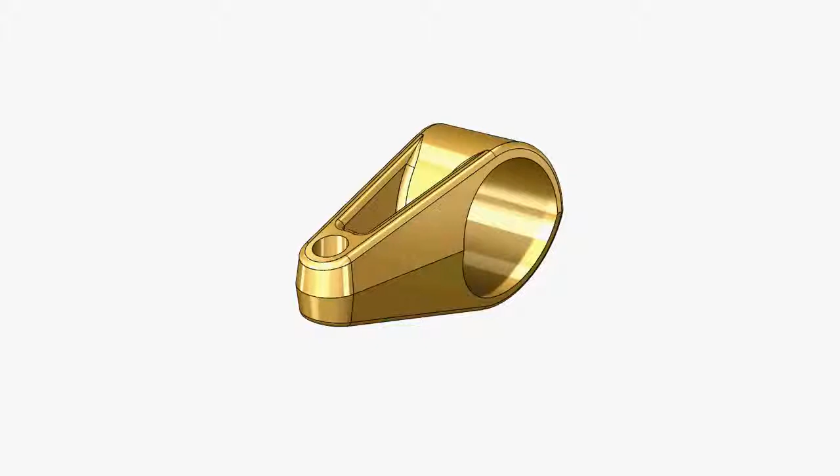Welcome to another video where we're going to take a look at the Model Mania Design Challenge from SOLIDWORKS World 2002. If you're unfamiliar with Model Mania, it's a design challenge held every year at SOLIDWORKS World where you're given a drawing similar to this and you're tasked with creating this part in SOLIDWORKS both as fast and as accurately as possible. And if that wasn't challenging enough, once you're done with this part, you're given a second drawing where you have to make a variety of changes to the part.

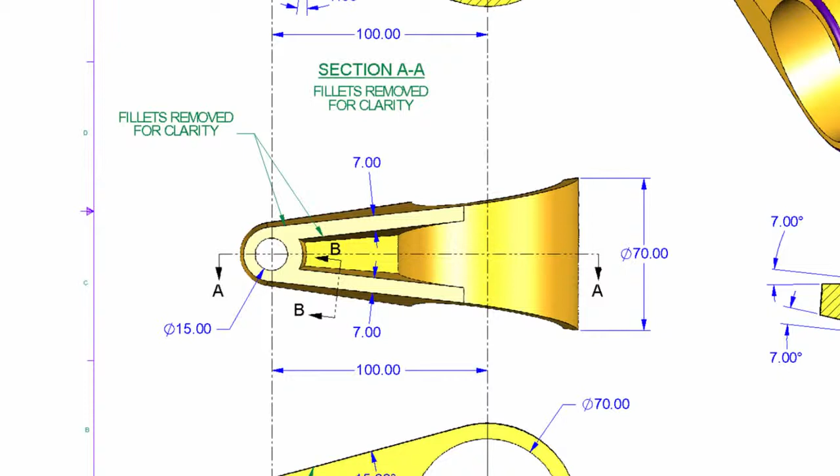Now we're going to hold off on looking at the second drawing until we get to that point because there's some surprises there. But let's go ahead and look at how we might tackle this. One of the first things you'll notice is that this part is symmetrical, both about section AA as shown in the top view, so from left to right, but also from top to bottom as we can see both in the section view itself and the front view.

Now, also unique is the direction of the two holes in this part. The main 70mm bore in this part appears in the front or right-hand side view, where the other bore of this part comes down from the top, and yet we have to capture that relationship. So let's go into SOLIDWORKS and look at how we'll tackle this. The first thing I want to do is start by capturing most of that profile, keeping in mind that this is a mirrored part or a symmetric part.

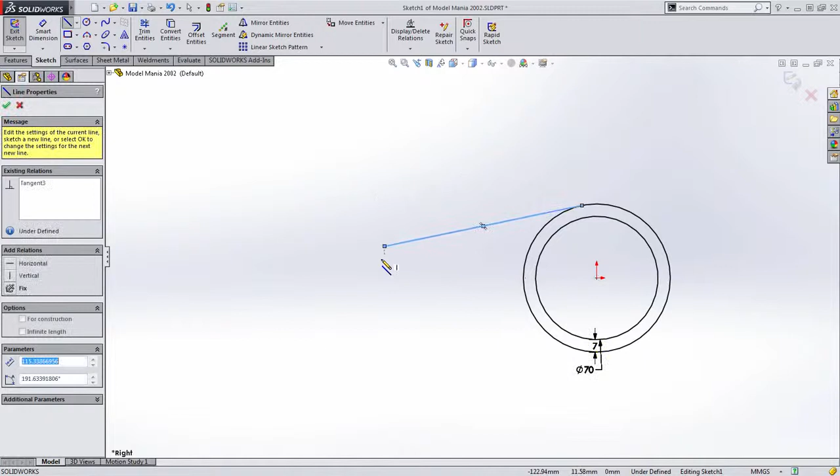I'm going to start on my right plane and I'm going to start with one of the easiest features, this big 70mm diameter circle. And while I'm at it, I'm going to go ahead and capture that 7mm offset right now as well. The next thing I know is there is a line that comes off from this circle that's tangent. If you drag a line out from a circle while maintaining tangency, you'll notice that that line will preserve that. I'm going to just drop this out here, and then we'll draw the rest of this profile. I'm going to snap out here and out here.

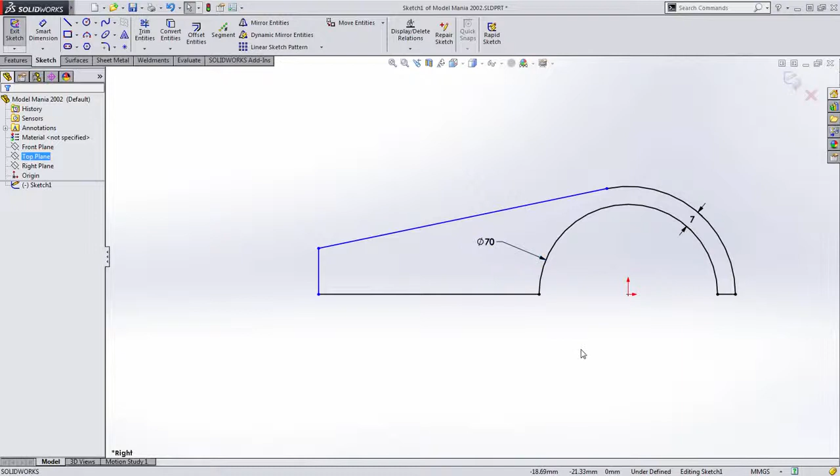Now, if you've watched the previous videos, I like to use contour selection, and we'll go ahead and do that again here. I'm going to go ahead and just trim these arcs. Now I could go ahead and remove all of that just like so as well. But keep in mind, you could have left this. There's no reason you have to trim this. Now the next thing I need to do is capture this angle. That's 15 degrees. Let's drag this in because I know that that's pretty long. So we'll set that to 15. And now we have to determine where the end of this is.

Now the end of this, if we go back to the drawing, is determined by the diameter of the bore in the top, but also the 7mm offset to the outside. So if we come back, how do we capture that? Well, there's a variety of ways you could do this. You could do this doing some math. For example, you could put a construction line in here, and you could say, well, it's 100mm out to the center of this circle. And then you know that from here to here, it's going to be half the diameter. So we could type in 15 divided by 2 plus 7mm, and we could get it that way.

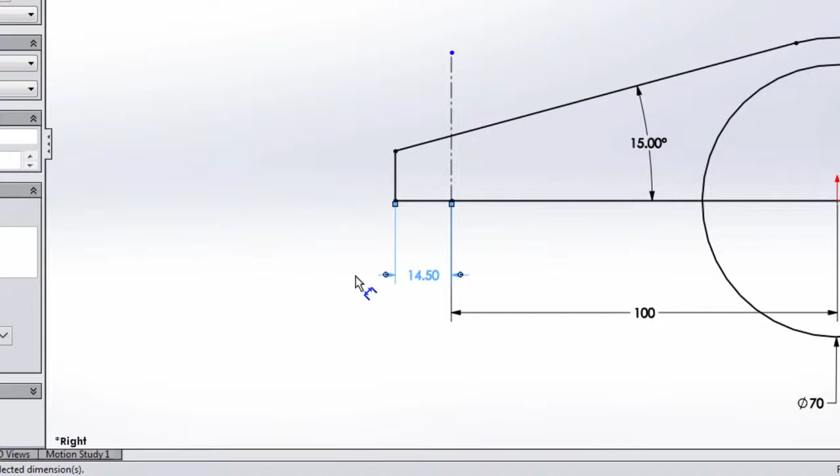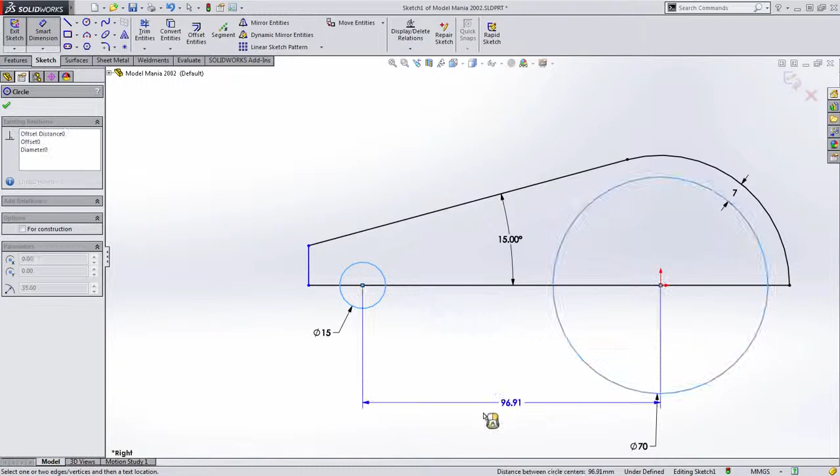But what happens if the diameter of the circle changes or the offset? You'll have to go back in here and recalculate all of that. So this isn't a very efficient way of doing this. So let's go ahead and delete this geometry and think of another way. Even though the circle is drawn from the top view, there's no reason we can't use a circle and capture this information here in an earlier sketch. So I'm going to do just that. I'm going to dimension that 15mm diameter circle 100mm off from the primary bore.

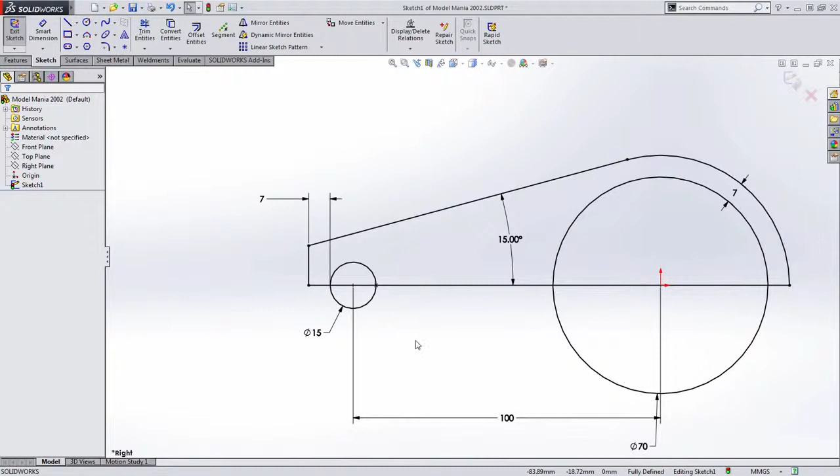And then I'm going to dimension from the end of the part, and while holding the shift key, snap to the tangency of that circle and specify that 7mm dimension. And now that the sketch is all black, we know that it's fully defined. We're not going to use this circle when we go to extrude this, but we will reference it later. In fact, I'm going to do a little trick here to save me some time later on, and I'm going to drop a point on the quadrant of that circle. You'll see in a minute where we use that. Now I'm going to close this sketch, and I'm going to choose to extrude it.

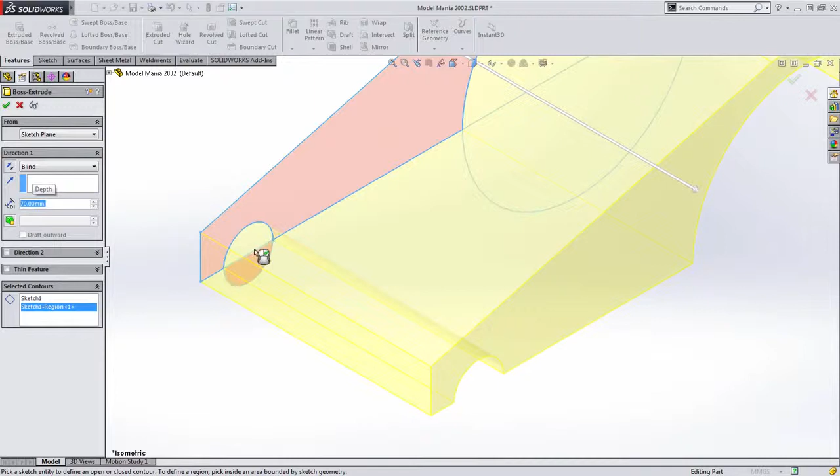And because SOLIDWORKS doesn't give us a preview, you can also see by looking at its cursor, it's looking for contours for us to use. So I'm going to go ahead and choose the main contour here. And if we drag this out to the 70mm it's supposed to be, you can see that we get this arc from that circle. Well, this is the real beauty of contour selection. I can just select that circle and fill that in.

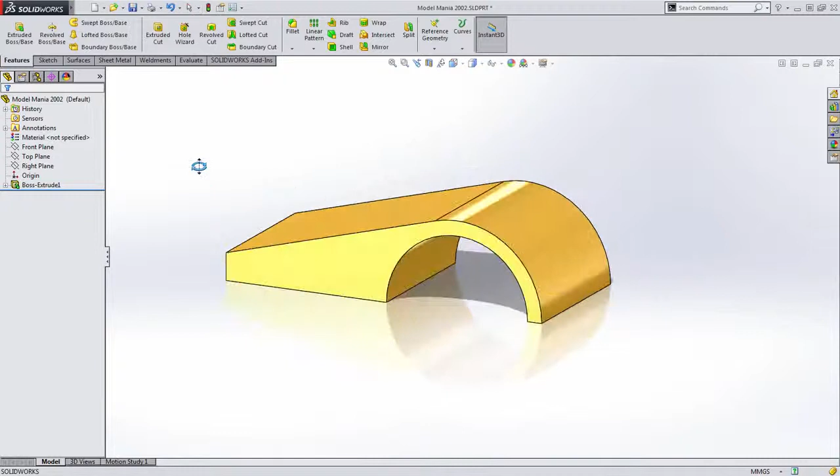Now, I did choose to extrude this 70mm, but it is a symmetric part, so it probably makes sense to maintain a midpoint relationship to keep all that geometry in the middle. That'll be especially important in just a minute here, as you'll see. So we've got this main body of our profile done.

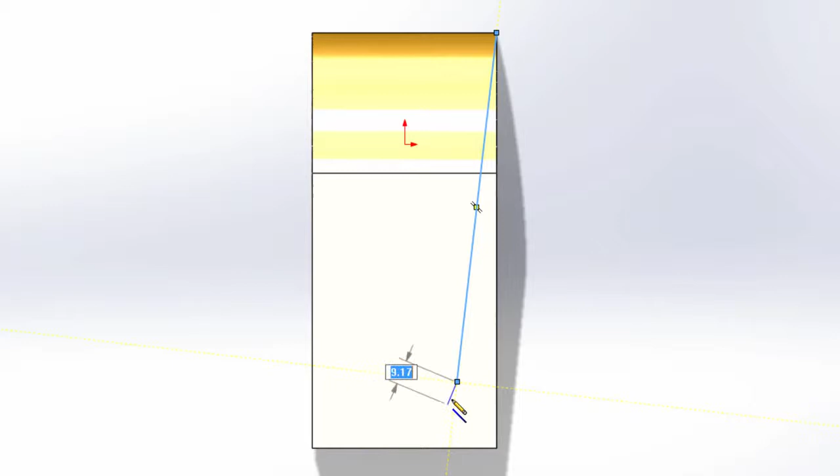The next thing I want to do is I want to look at bringing in those sides out to that tangency. So a good place to do this, we're going to draw a sketch on our top plane. I'm going to draw a line from the vertex up here, and I'm going to bring it down, and I'm going to use this trick that's inside of SOLIDWORKS where, while you're in the line tool, if you go back to the end point of a line, it'll actually snap and switch to an arc. And we'll draw another tangent line, and you can see I didn't get it quite in the center. That's okay. I'm just going to drop this here, and then we'll just drag that and snap that into place.

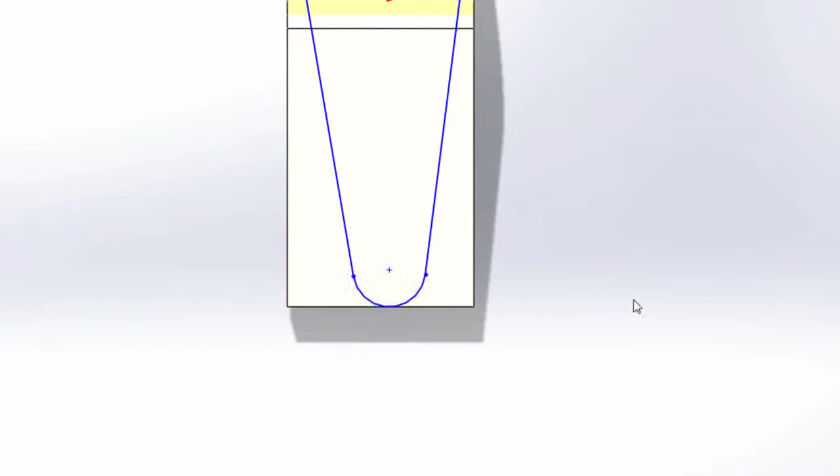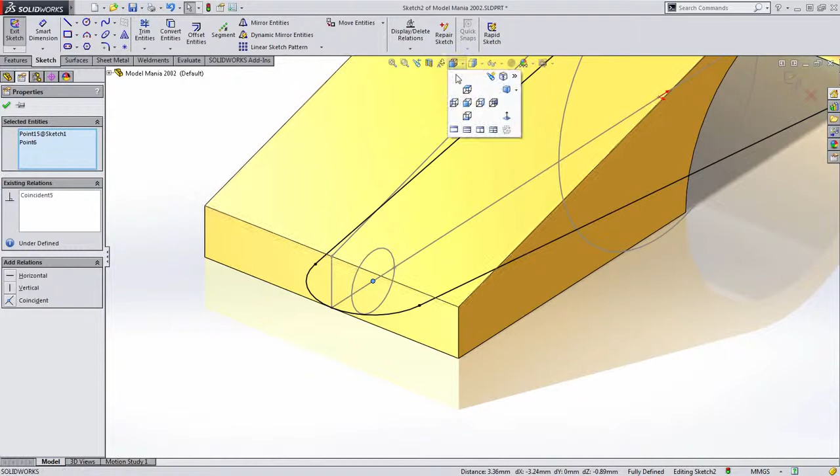Now, I know that this arc needs to be tangent to the end here, but I need to somehow calculate the diameter of this. Now, again, we could do a bunch of math, but what we're going to do is we're going to use that geometry we created in that first sketch. In the Feature Manager tree, you can click on any sketch and choose to show it. Once that's done, you'll notice now I can take the center point of this arc and, holding my control key, select the center point of this arc and make those coincident to one another. If you look at the top view, you can see that what we did is we captured the center point of that circle in that very first sketch and we're reusing it here.

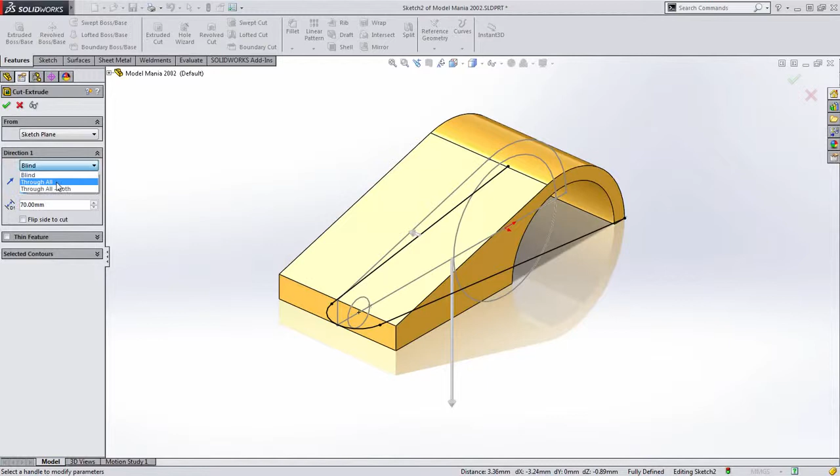The next thing I'm going to do is I want to cut this out. Now you'll notice something unique about this sketch. It's not closed in any way. That's okay. SOLIDWORKS will allow you to use this. When you go to use an extruded cut with an open profile, SOLIDWORKS presents you with a few new options. One of them is this little arrow with the flip side to cut. And if we change this to a through all end condition, what SOLIDWORKS is actually going to do is remove all the material on the outside of that sketch geometry. So we could have gone in and drawn the rest of that geometry, but there was no reason to.

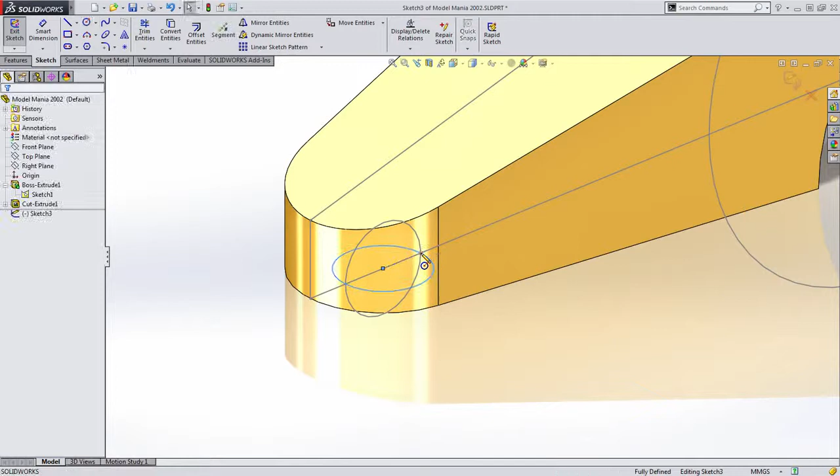Now I'm going to reference that sketch again. This time we're going to draw the actual cut that goes through here, and you'll see how convenient that point we created is going to be. I'm actually going to snap from the center of the circle to that point we created on that vertex, and then all I need to do is go ahead and do a cut extrude. I'm going to switch the direction and change that to a through all end condition. Now I'm done with that sketch, so I can go ahead and hide it now. And that easily we've created the top half of our part.

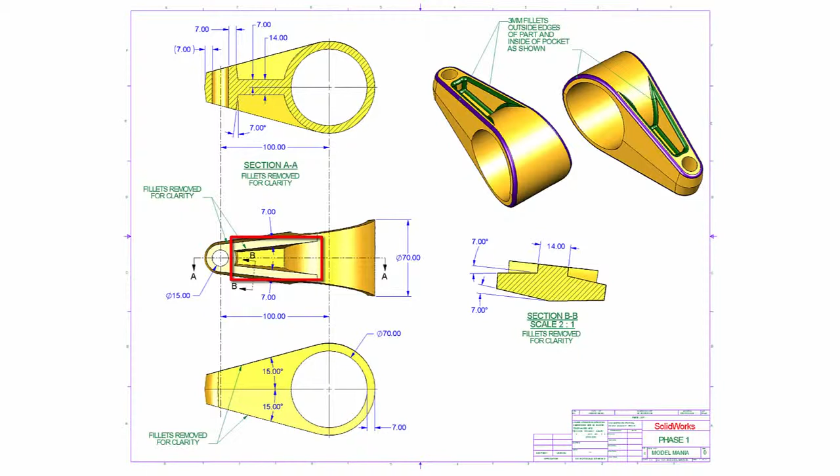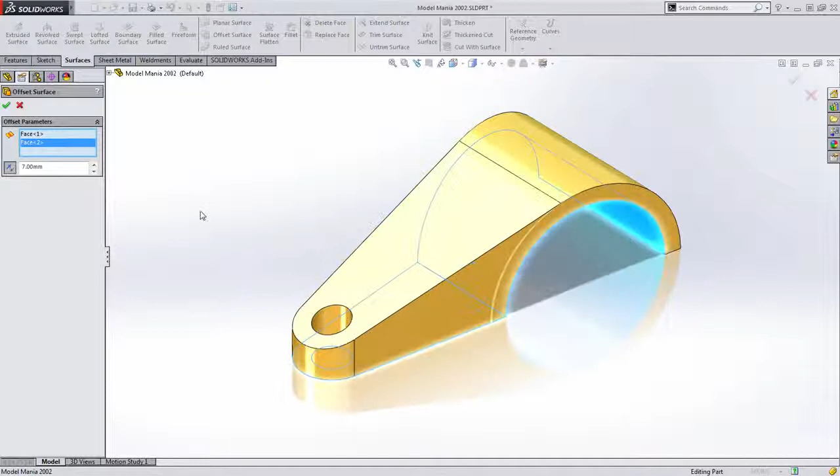Now if we go back to the drawing, the next significant feature is going to be this pocket. And you'll notice it's a 7mm offset from all the surfaces around it. So let's go back here to the SOLIDWORKS part, and I'm going to show you two different ways you can tackle this. The first way is actually using some surface geometry. If I go up to my Surfaces tab on the Command Manager, we can create an offset surface of 7mm, and I'm going to offset this bottom face and this face here, and I'm going to choose to reverse their direction to the inside. Now, you might not be able to see those, but if you'll notice, a new folder has appeared in the Feature Manager containing this new surface body. There you can get an outline of it. Let me show you how we're going to use this.

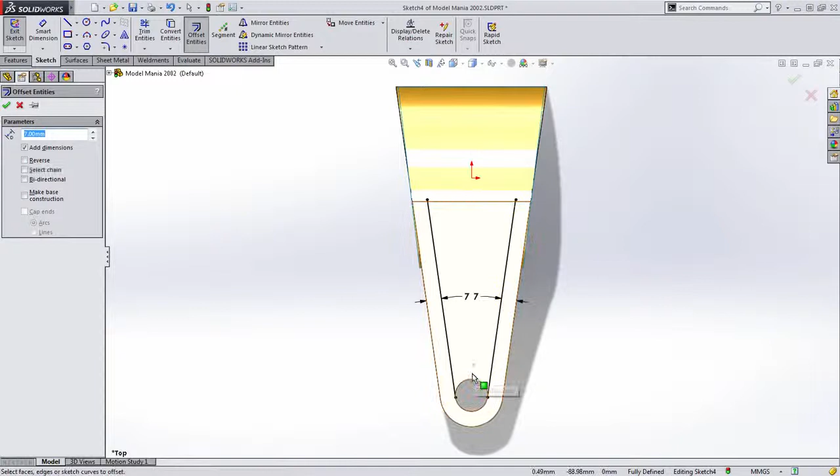I'm going to start a sketch on the top plane. And what we want to do is we want to offset several different pieces of geometry. Again, 7mm. So I'm going to offset that edge. Let's do that again to offset this edge, and then one more time to offset this circle here. Finally, I'm going to go ahead and clean this up by using Power Trim, and we're just going to get rid of some of that excess material.

And in this case, we are going to close the sketch off. Now you're probably wondering, how are you going to use a sketch down here on the top surface to cut something up here? This is another great feature inside of SOLIDWORKS. When you cut, you can actually go in and choose to do the cut from an offset.

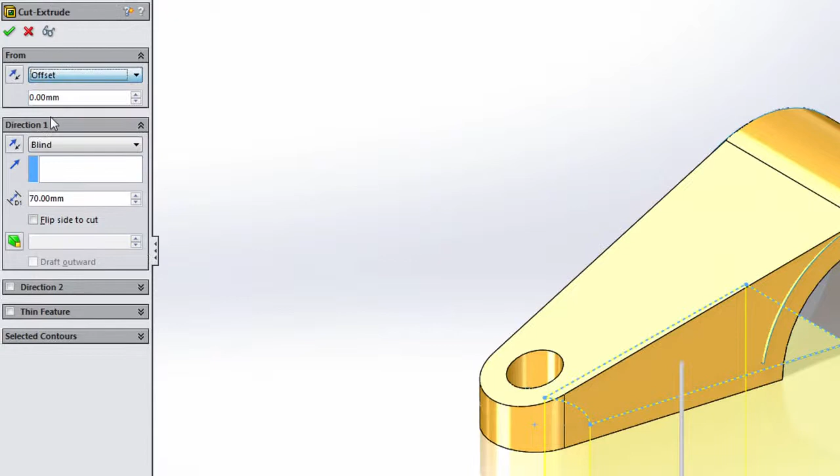Now, the diameter of this arc could change, so we're just going to set this way out there in space, like 100mm, and notice that the cut actually starts up here. And then for the end condition, we're going to change this to an up to surface cut condition, and I'm going to pick that right out of the graphics area there, and there we have it. We've gone ahead and created that cut.

Now at this point, you don't really need this surface anymore, so you can either choose to hide it, or I prefer, if I really don't need it, to just delete the surface out of the part altogether. We just needed that for some reference geometry. Now, the next thing we have to consider is all of this draft on this part. And I actually made a mistake intentionally here.

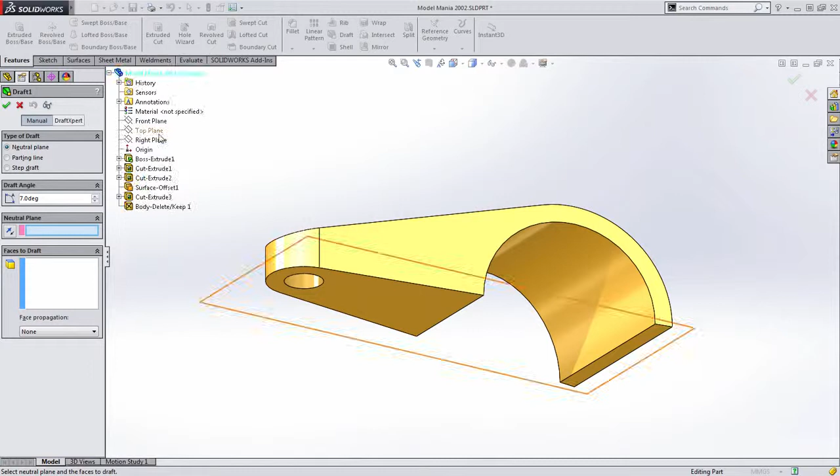The first piece of draft we're going to run into is along the outside of the part. This needs to draft 7 degrees in, and a neutral plane draft is a great way to accomplish this. I could pick this face or the top plane. I always like to use the system planes whenever possible. And we just select the faces that we want to draft. And when I right click, SOLIDWORKS drafts those in, but look what's happened.

The offset of our material wasn't right in this case. This is actually very easily corrected. You'll notice if I go over to the Feature Manager tree, if the draft had happened before that cut, well, the cut would have been offset from the proper 7mm. So you can see it's really easy to quickly manipulate the Feature Manager tree to make different changes. There's no reason to go back and undo what we've already done.

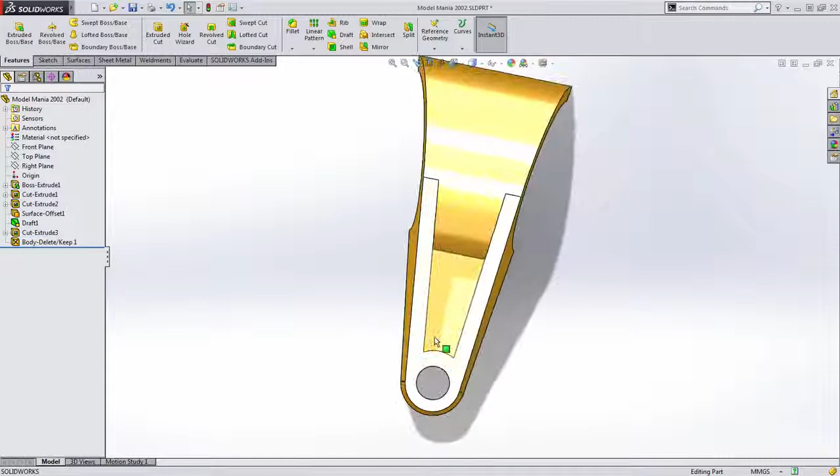Now the second draft needs to start from here and go inwards. So how do we capture that? If we did a neutral plane draft from this surface, it would make this part way too thin. This is where parting line really comes in, and you heard me accidentally mention that. Parting line draft works in a similar manner in that you select a pull direction, but instead of faces, we're going to choose edges to draft from.

Now I'm going to grab this edge, and you'll notice this arrow. That tells me it's going to draft this face. You can change that, but we don't want to draft that outside face. We want to keep that down. So let's go ahead and grab all these faces, and we'll make sure that those arrows are all going in the right direction. They're a little hard to see, but when I hit OK, SOLIDWORKS just reverses the draft.

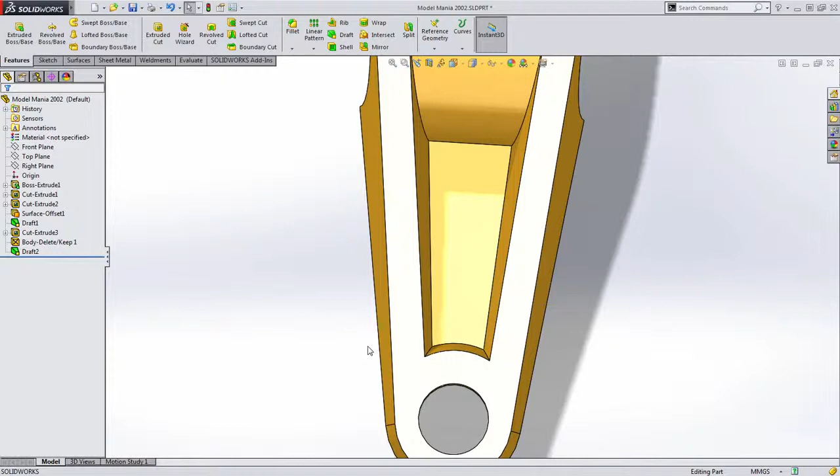We didn't have to do the math and subtract 7 and then another 7. It just took care of it for us. And that's it. We've got that. The next thing we could do is add some fillets, but I want to go back. I mentioned there's a couple ways we could have created that pocket. I did this with some surfacing.

I'm going to go ahead and delete this surface, and we're going to go ahead and get rid of several of these other features here. I'm not going to create a cut in this manner or this draft for that manner either. So here we've rolled back. We still have the draft on the outside of our part.

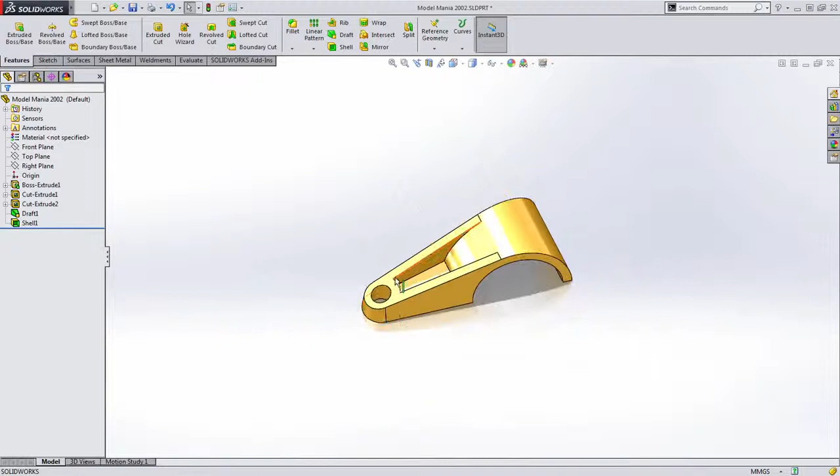Another way we could have tackled this, if we know that the wall thickness is always going to stay 7 millimeters, we could have used a shell feature, and by selecting this top face, it shells and hollows that out to that face. Now notice in this example, because of the order of the draft, these faces are tilted inwards. They're offset from that outside face.

Well, that parting line draft actually works really well here, and all we have to do is specify that draft angle, and SOLIDWORKS will fix that orientation automatically for us. Now you see how I got that error? That means that one of these edges is potentially going in the wrong way. My errors disappeared, so we're going to go ahead.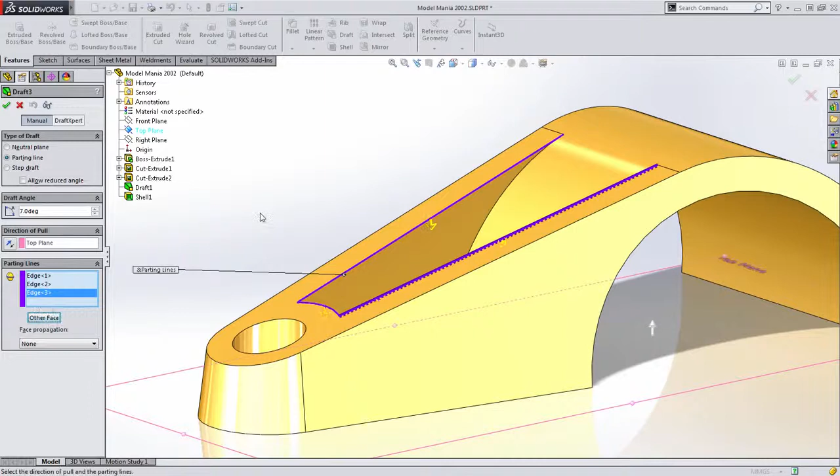There we go. See how these arrows are pointing to the outside? We need to correct that. So I'm going to grab those edges and make sure that those are both pointing down, and now when I press OK, we get the same results as before. So there you have it, 2 different ways to look at a very similar problem. Shell's probably the easiest, but it requires that all the offsets always remain 7.

The other way we did it, we could change any one of them. Now, the next thing we want to do is there are some fillets on this part. If we go back to the drawing, you can see there's a bunch of fillets on that inside pocket. So if we come back here, how are we going to do this?

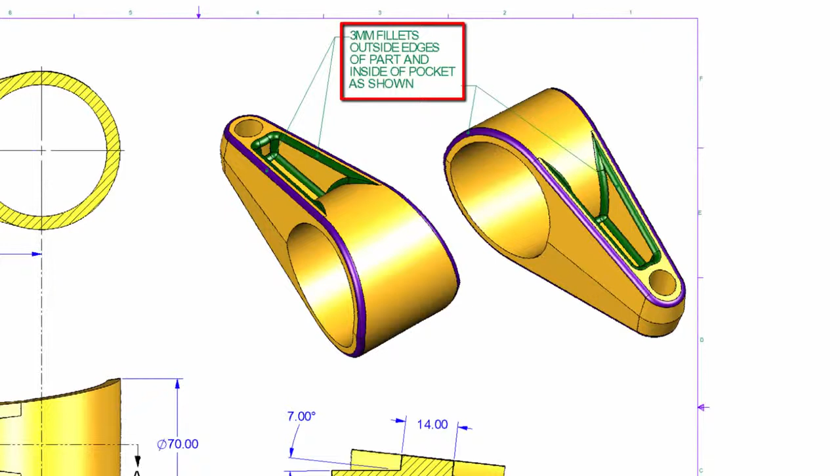Well, if you've watched any of the previous videos, you've probably seen that selecting faces provides a very powerful way to quickly grab a lot of edges. With 3 faces, I've grabbed all those edges that easily. Now, I could create the fillet that goes around the outside, but I do want to make sure that it blends to the second half. So let's look at mirroring this.

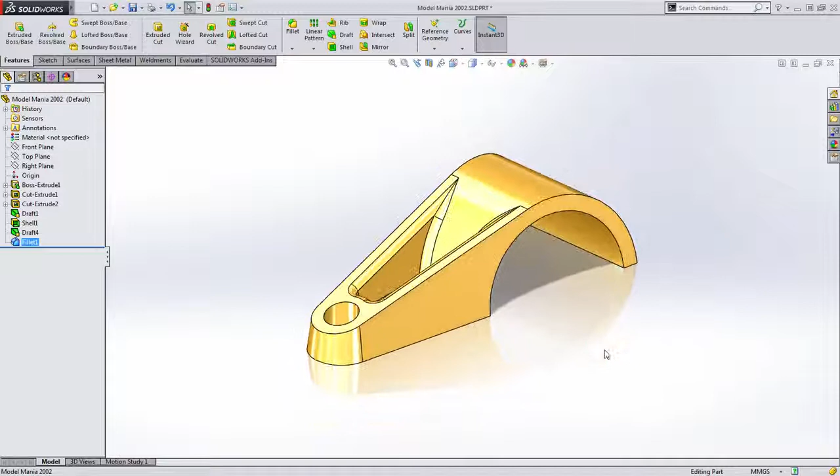So I'm going to go ahead and choose the mirror feature. And for the mirror face, again, we're going to use that top plane. We've created everything off from it. And we're going to use the bodies to mirror option. I'm going to grab the main body of this part, ensure that Merge Solids is checked and press OK. And there you have the part, with the last thing we need being those additional fillets.

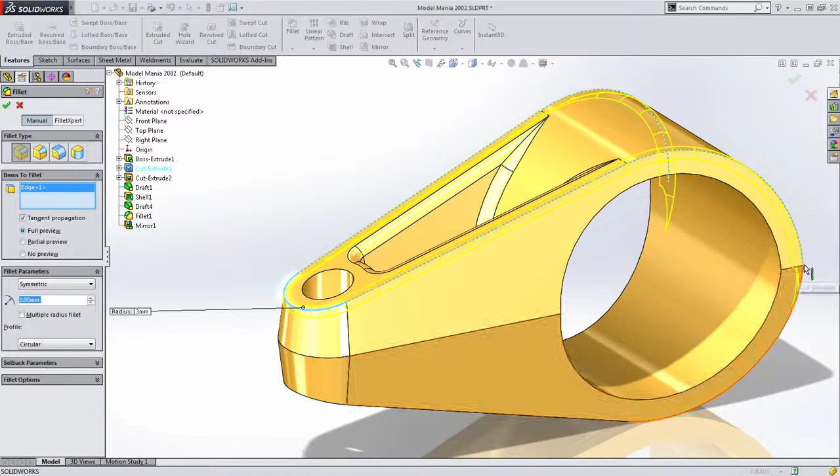Now, I've talked about selecting faces. Here's an example where by selecting a face, we get a lot more than we're bargaining for. So here's an example where a face isn't necessarily a good choice, but maybe an edge will be. And you'll notice that the tangent propagation follows all the way around the part to about here. And that's because there's no tangency across that sharp vertex. So we'll just go ahead and grab that additional edge on the bottom, and you can see that it puts those together right there where they need to be. So we have our part done.

Now here's where the real challenge comes in. We're given an additional drawing, and in normal Model Manias, you're tasked with changing several dimensions on the part. In this example, we've actually been tasked with creating several configurations of this part. And this is typical to what you would see in a parts or a supplier's ordering catalog. You'd see a table with several different dimensions that you could order the part in. So we want to be able to capture the same type of thing. So let's go into SOLIDWORKS and figure out the best way to do this.

We're going to do this obviously using configurations, but there's a really clever way we can accomplish this using something called a design table. A design table is a great way inside of SOLIDWORKS to quickly build up a variety of configurations. And this can be accessed by going to Insert, Tables, Design Table. Now I'm going to go ahead and choose the Auto Create option because I want to go through the process of selecting some information, and I'm going to simply press OK.

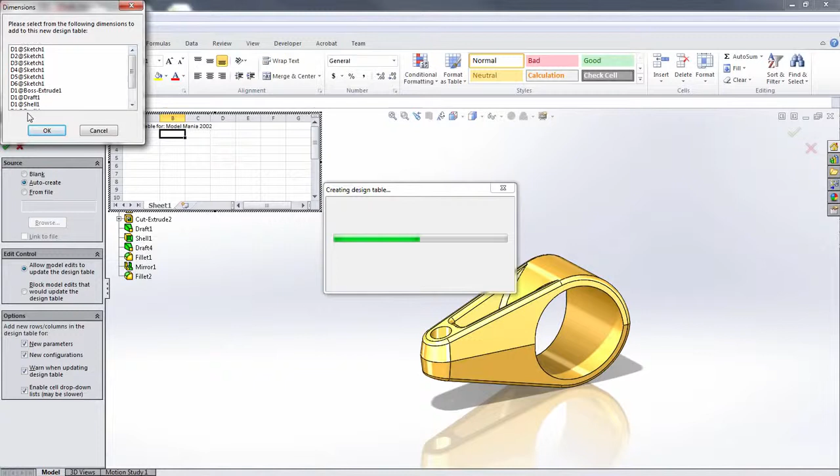SOLIDWORKS then launches Microsoft Excel into the graphics area, and it's asking us which dimensions do we want to include. Well, to be honest with you, these names don't mean a whole lot to me. So I'm going to go ahead and just hit OK at this point and skip that process. What we want to do is capture some very specific dimensions. So I'm going to just pick on this face, and you'll notice all the dimensions appear. This is because I have something called Instant 3D enabled.

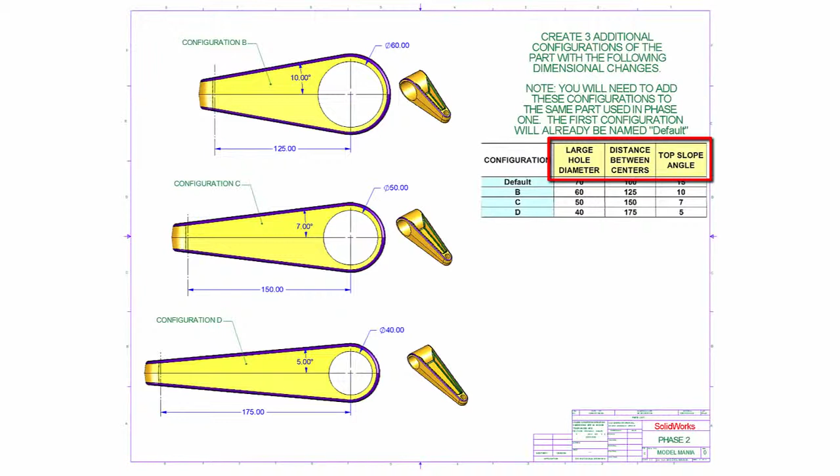If we go back to the drawing, we can see that we need the large diameter hole, the distance between centers, and the angle of that slope. So let's go back to SOLIDWORKS. All I have to do is pick that diameter, the distance between centers, which we have in this first sketch, and the angle of the slope. That easily we were able to do this.

And then we type in the other values. So we have 60, 125, and 10. Oops, I have to tab through this. 60, 125, and 10. 50, 150, and 7. And 40, 175, and 5. We do need to give these names as well. And the names are B, C, and D.

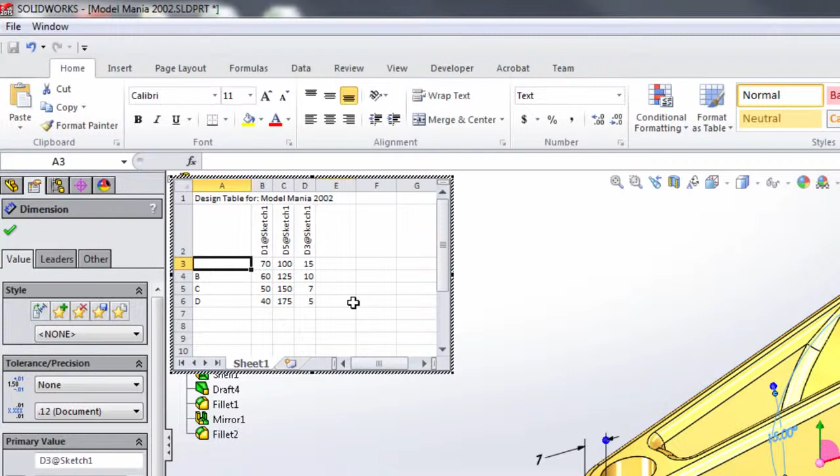Let's not let Microsoft Excel automatically fill this in. And this is the default configuration. It actually should have filled the name in here. We'll go ahead and just exit out of here. And you'll see that SOLIDWORKS will tell us that it's created these configurations automatically for us. So there we go. We've got the default configuration and configurations B, C, and D. Using that design table made that whole process quite easy for us to do.

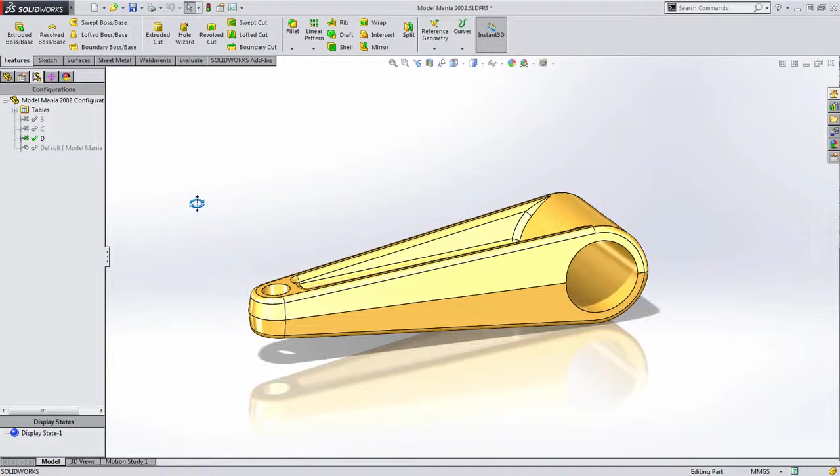So there you have it. The design challenge from Model Mania 2002 with a unique twist where we're not making one change in phase 2, but instead we had to make 3 completely unique parts.